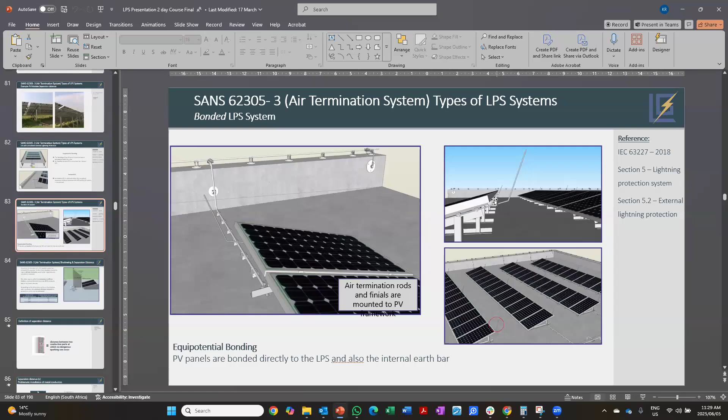And to determine this separation distance, there's a calculation in the standards. I'm not going to go into that, but there's a calculation that can work this out. Alternatively, you can put in your standard air termination rods, which will basically give you separation distance. There's two types of shadow.

There's core shadow and diffuse shadow. A core shadow, as you can see, is a dark shadow that will cause shading onto your solar panels. That's also a big problem we have in industry. Alternatively, you want the diffuse shadow, which is like a light shadow on your solar panels. So that is the idea when you're installing lightning protection.

To get this separation distance, there is a calculation that's worked out. So if you use a 10 millimeter rod, it needs to be 1 meter away from the solar panels.

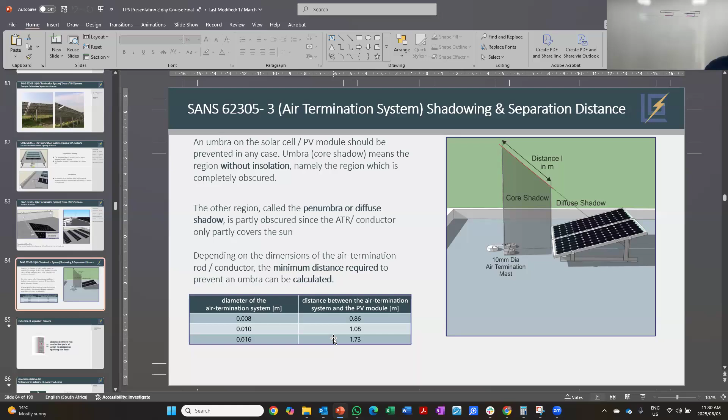No, it's fine, absolutely. So what we find is there's no such thing as a perfect installation on a solar installation when it comes to lightning protection, because there's always challenges. For example, if you take most sites, I'm talking about shopping centers, your big commercial projects, the big objective of the EPC, the solar installer, is to try and see how many megawatts or kilowatts can I put onto this roof, and how much space can I take up. But what many of the EPCs forget is, what about the lightning protection?

So now there's some cases where I have to be a meter away from the solar panel, and we can't do it. We can't be a meter away purely because the parapet, which is the side of the building, is 500 mil away. So now comes the question, how do you do it? And that is exactly also why many installers will opt to install, like the video, air termination rods below the panels. So that is a big challenge we have in the industry when it comes to lightning protection for rooftops.

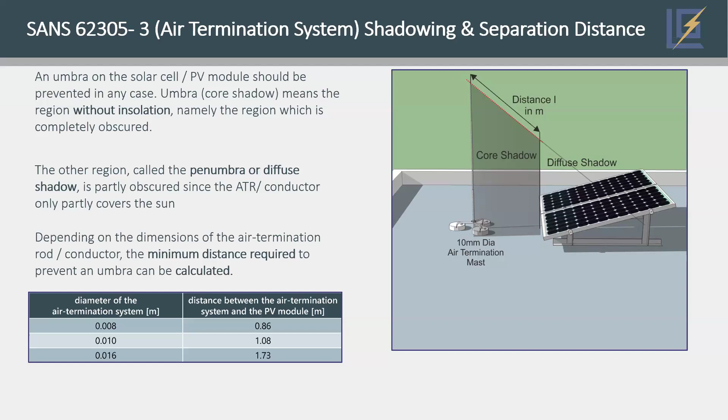Now, most cases, depending on the roofs, it also becomes tricky because the brackets you get from Lumax, the brackets you get from K2 or any alternative company, has got anodizing a lot of the time, so there's no bonding. And the problem we face is SANS 10142 says that if you put anything on top of a roof that is a steel structure, it shall be bonded. So now you go to site, you install your array of solar panels.

Let me see if I've got another picture. Let's use this. So you install your array of solar panels on a steel roof, and you use a Lumax clamp to fasten it.

The problem is solar installers link each solar panel with 6 millimeters square or 4 millimeter cable, whatever the standard recommends. Then you've got a cable running into your cable tray, which goes down to an earth rod, and it gets equipotentially bonded. But what we find is, because of the waterproofing on the roof, and because of the anodizing on the clamps these days, since they're not really galvanized, there's no continuity.

So I can test between this solar panel frame and that structure, and there'll be continuity, 100%, 0.2 ohms as per the standard. But if I take it from that Lumax clamp to the steel roof, 99% of the time there's no continuity, because of that anodizing. So now that brings the question.

The standard says your solar system must be electrically bonded, equipotentially bonded, meaning you need to connect to the electrical system. Your building needs to be connected to the electrical system, which shall be done by a registered person. So that has to be done. And what we're finding in 99% of cases, the solar panels have continuity, but the roof to the solar bracket has no continuity.

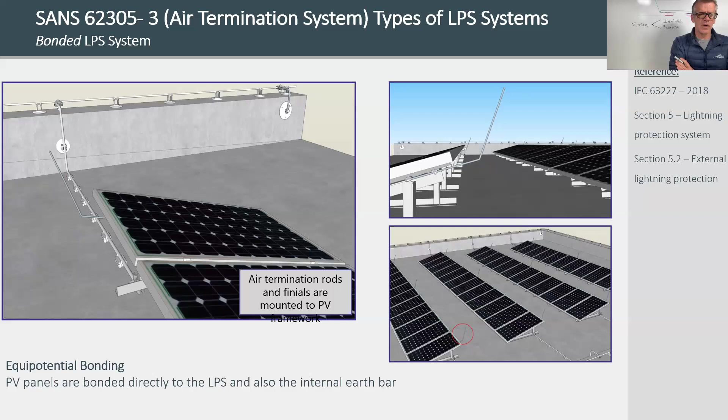Can you stop sharing quickly? Sure. I see we've got one or two questions coming in, but before we look at the questions, I am going to pin the camera. I don't know whether it has value, guys, but if you can't see my camera, just pin it to the conversation and it opens up the image. Kenneth, I don't know if you can see what's on my whiteboard. Yeah, I can see it.

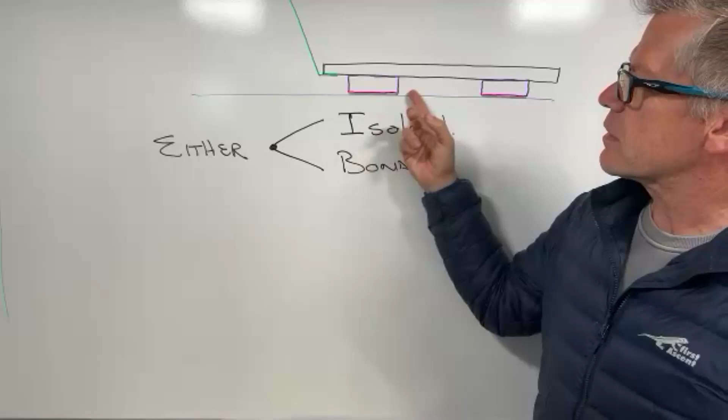Yes, so while you were talking, I quickly made up this drawing. This is what the video represented. This black part shows the solar module, the purple block is the mounting structure, and the red is an insulating rubber in between the mounting structure and the IBR roof sheet. Now that is obviously the part you were talking about that creates the fact that there's no continuity between these two metals, right?

Correct, yes, absolutely. The other thing you mentioned is if we have a lightning strike here, there's absolutely nowhere for the surge to go, because this is insulated from the roof.

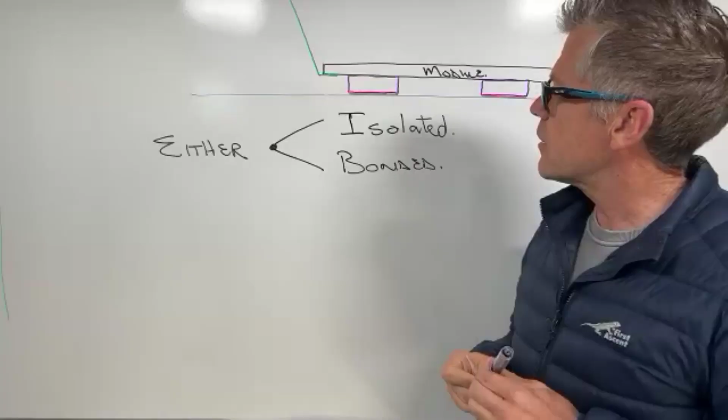So where I'm going with this is you mentioned something you called a separation distance. That got me thinking, because you effectively get two types of lightning protection systems: an isolated one and a bonded one. The one where you have the separation distance, that's the isolated one, isn't it?

Did I lose you? Have I lost you? No. Okay, on the isolated system you need separation distance. But on a bonded system, you also need separation distance. It's both. Remember, we're working with a steel roof. If it was a concrete roof, it would be different. Yes, thank you, perfect.

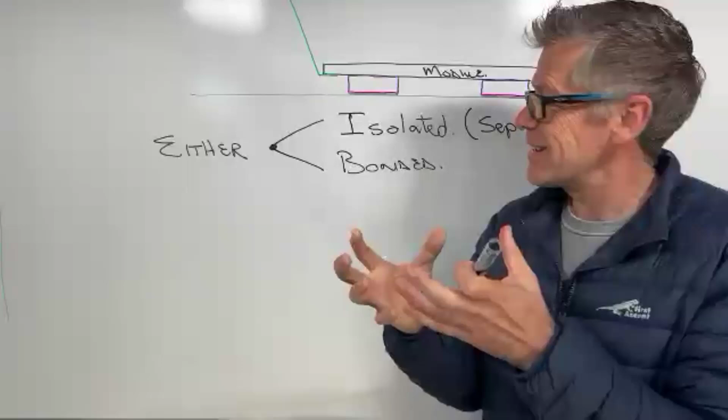This is bringing us closer to where I was heading with this conversation, because there are a couple of issues with what they've done here - they've actually forced the installation. Instead of planning it to be either isolated or bonded, the minute you've got a steel roof, you're forced to go with a bonded system, because your solar system is supposed to intrinsically become part of the same continuity of the metal. Am I right? Yeah, absolutely.

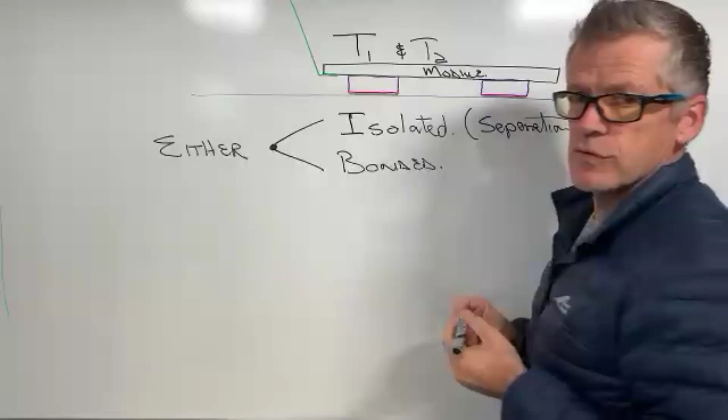So because they've put these air termination rods in, it means they are expecting lightning. And because they're expecting lightning, this forces them to put in type 1 and type 2 surge protection equipment. Theoretical, yes. I'll get to that now - give me the practical side of the conversation.

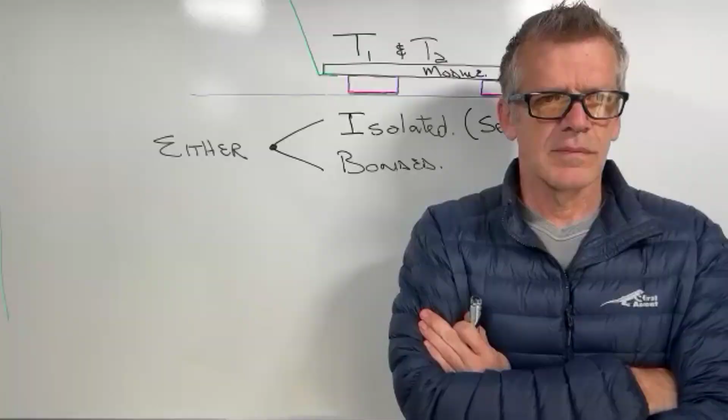So what we find at the moment, we're just talking about steel roofs now - it's now been proved, over 70 megawatts of projects, that the inverters come out standard with a type 2 surge arrestor. The standard, the lightning protection standards, and SANS 10142 actually say if a lightning protection system is installed and it is bonded, meaning you bring lightning currents into your system, you need to install a type 1, type 2 lightning arrestor. That's the theoretical part. The practical part is it's not economically viable to install class 1 SPDs, because for that inverter, if you've got 20 strings, you'll need to install 20 type 1, type 2s at, for example, 2,000 Rand a pop. So now you're looking at a cost implication for something that might not be needed.

Because if you start thinking about it practically, that steel roof is connected to either rebar of the building or to I-beams, so you've got a hundred different paths going down to ground. So by the time it gets to your inverter, the type 2 will be able to clamp that lightning voltage. According to 60364, which isn't a solar standard, it's a similar standard, a type 2 must still handle lightning currents as well - they call it partial lightning currents - so it will be able to absorb that lightning current. That's the practical part, and that's what we've done for 70 megawatts with no problems.

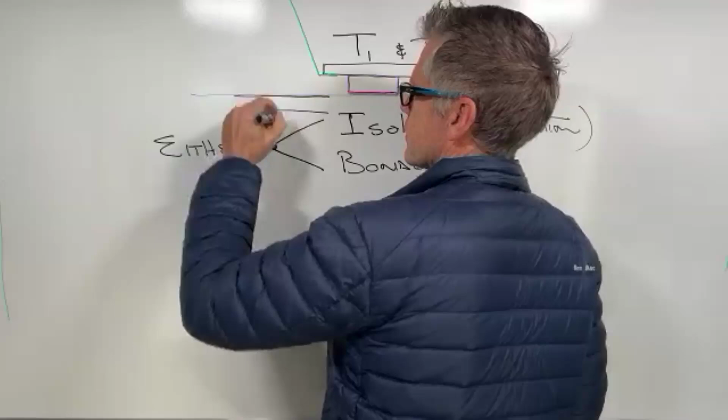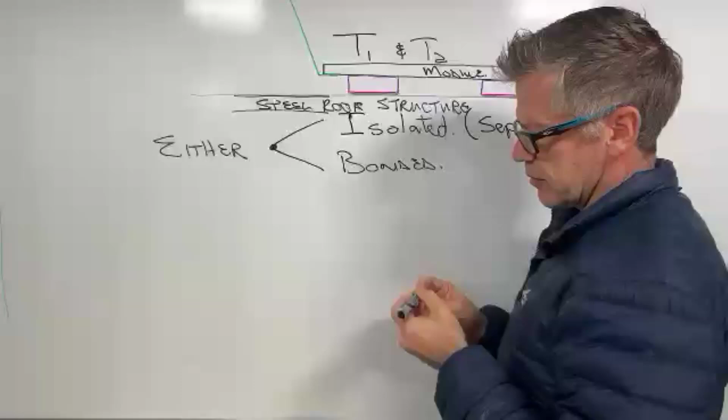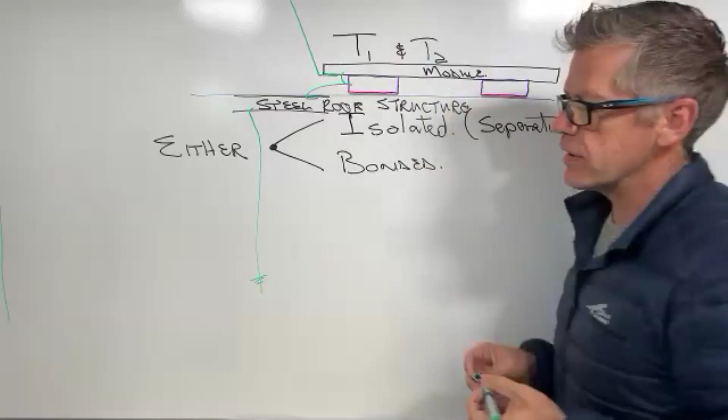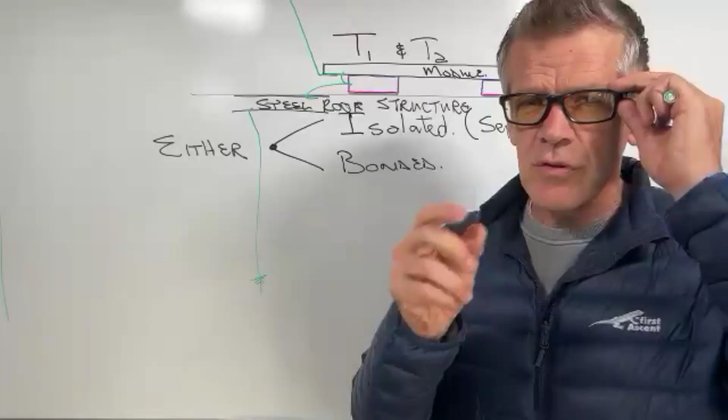But now what that means is between the roofs - so if I have my purlins, my steel structure, my steel roof structure over there - this is going to mean you have to ensure that this is continuous to that, continuous to that, continuous to whatever it is. If you have steel beams going down bolted into concrete pillars or foundations, this gives you a path, and you're allowed to use it according to the standard, but it's not going to help you if you just have one.

So on a steel roof like this, you don't need to add - maybe I can start here, because you're going to ask how do you know if it's continuous. There's normally a tester that injects 10 amps into the building, so we can test the continuity of the roof sheeting to the building to the electrical system. If that is 0.2 ohms, then you know the down conductors are fine, and you don't need to add any additional down conductors because it's already connected to the roof. As soon as that continuity is not there, then you have to do what Carl is saying - have down conductors that go to an earthing system.

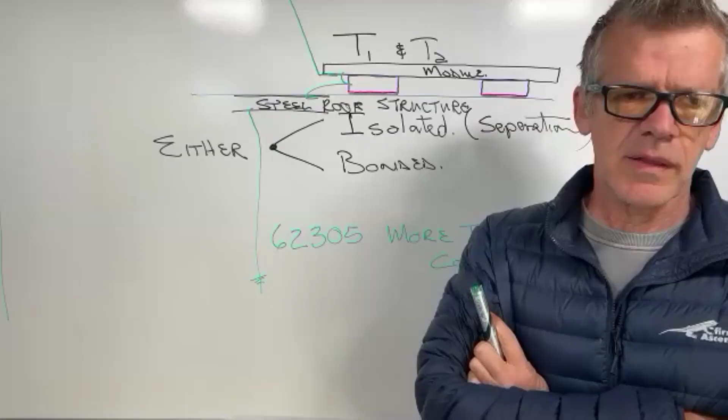Does that make sense? I'll show a picture just now, I've got it in my presentation. I'll show the difference, that'll be pretty cool. Thank you very much. Was there anything else? Can we quickly jump to the questions?

We can, and then I'll show that. It's fine because I see there's quite a bit. Yeah, where do we start?

So Peter asks, can you use the roof itself for bonding, or do you still need to bond the air terminations with each other? And is it needed to run a down conductor to an earth spike?

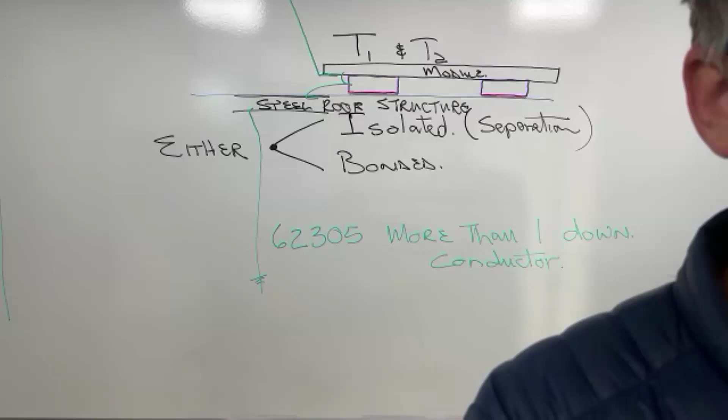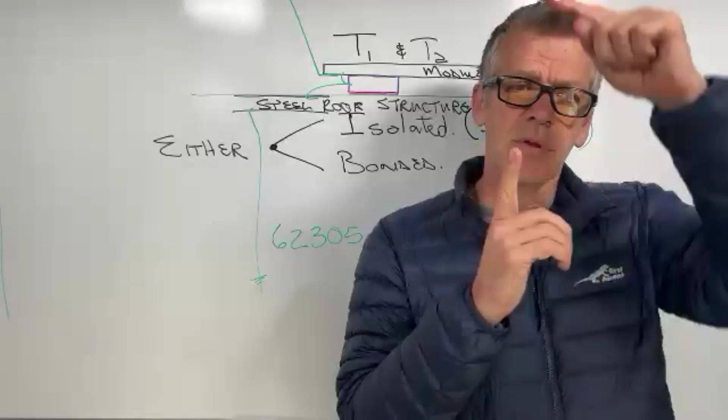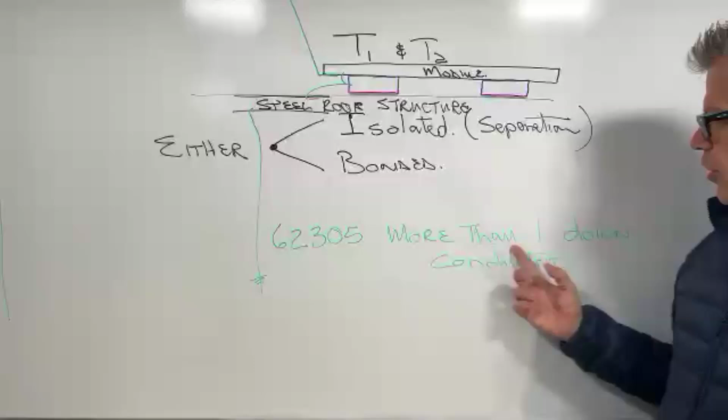So Peter, I'm going to answer that, and then Kenneth can add to it. If you're expecting a direct lightning strike, you've got to ask yourself: is one earth spike with one down conductor going to catch whatever lightning strikes it and safely conduct that down to earth? This standard says no. It says if you're expecting a lightning strike, you have to have more than one down conductor, and you can't go with a 6 millimeter or even maybe a 16 millimeter. You've got to size your cable according to what it is you're expecting to happen on site.

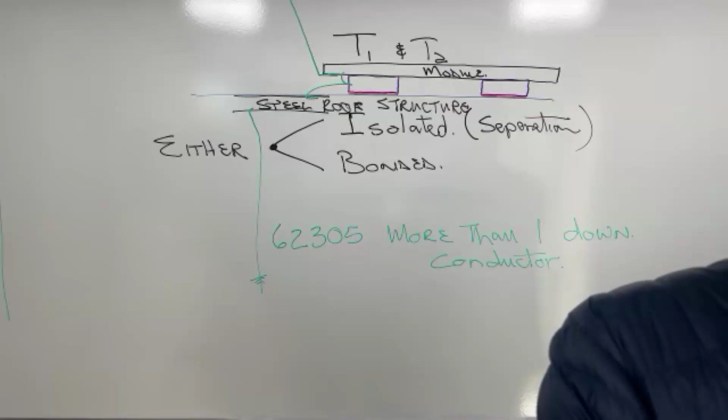Kenneth, to answer that: it's 50 mil square that's normally needed for down conductors. But in this case, you're right, it's exactly what you explained. Yeah, it's right. There's nothing more to it.

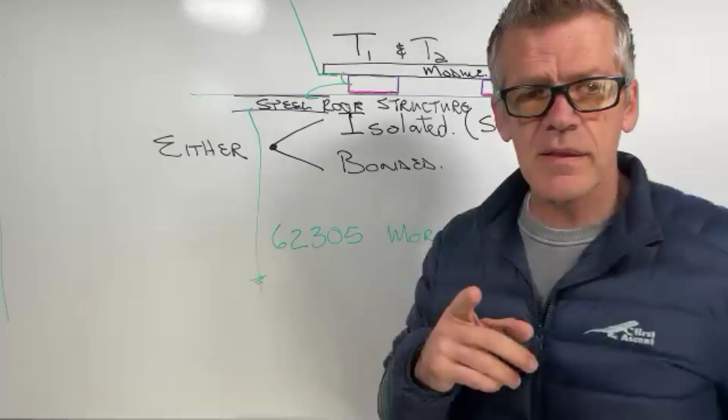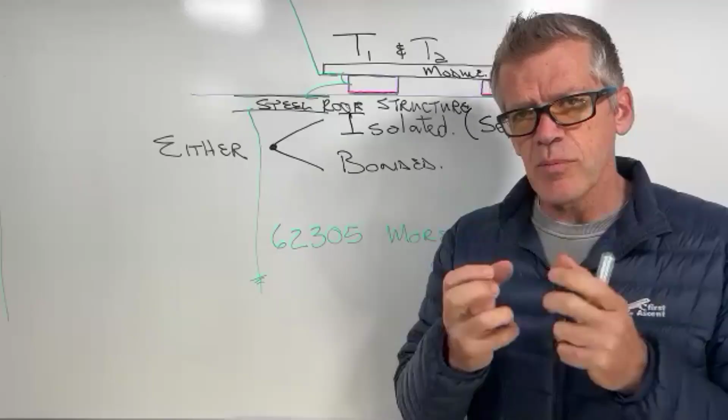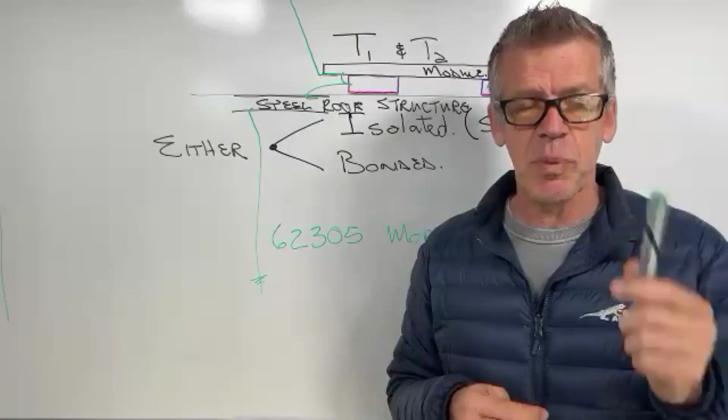I like the 50 millimeters squared because it makes provision for mechanical as well as electrical stress. Correct, so you've got to use a conductor that can handle not only the electrical conductance but the mechanical stress that the lightning will put on it. And for that, the standard says minimum 50 millimeters, but it specifies 50 millimeters for copper, aluminium, or steel.

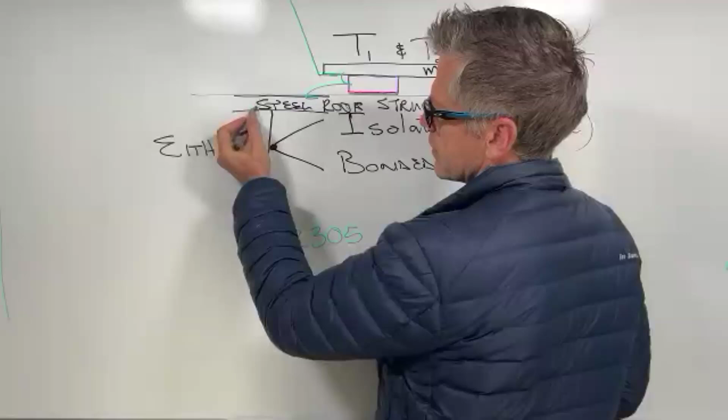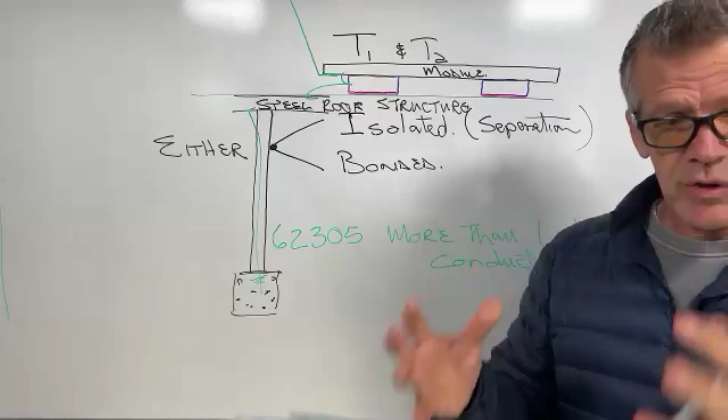Yeah, that's beautiful, because that brings us back to this pillar, as well as the foundation and all the other little bits that go along with it, to get your earthing system sorted. But that's something you'd also be able to assist the guys with.

Once you do a test, what we found is most buildings, I'd say 99%, already have continuity on the roofing structure to the building. So that's already done in place. It's very rare that you find a roof that's not bonded.

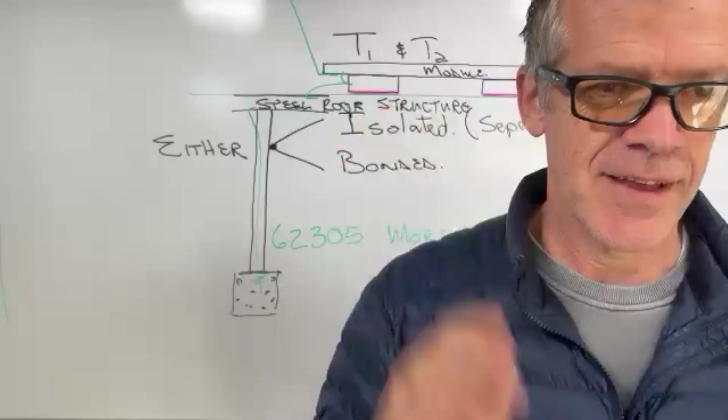And then we have Kevin. Kevin says: a vast number of installations, from domestic to commercial, are overpopulated. Maintenance and access walkways are ignored in favor of filling up the roof to a point where first responders would not even be able to get onto the roof. The aspect of fire setbacks and walkway standards are far more critical for safety. This is a real safety concern. The industry's fixation on grid safety in relation to these real safety issues is misplaced. Fully installed systems are actually a risk to the end user, their buildings, and first responders.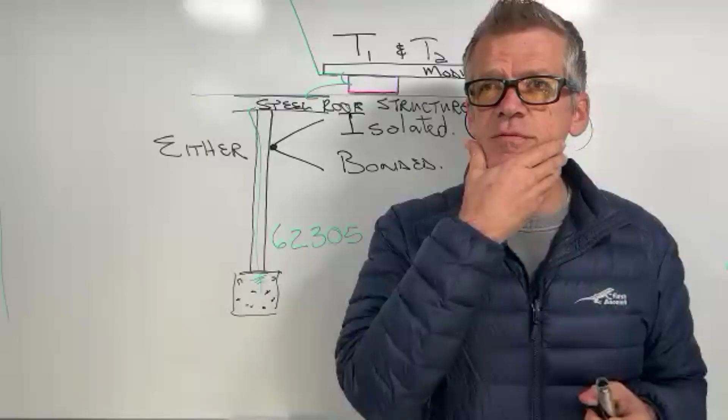Kevin, I definitely agree with you there, and I'm not dodging or sidestepping the issue—what you're saying is correct. But I think this discussion would have to be a different topic. That would actually make for an interesting meeting, so maybe the next one or the one after that, we could talk about first responders and access on a solar installation. At the moment, I think everybody's placing a lot of emphasis on electrical safety and electrical standards.

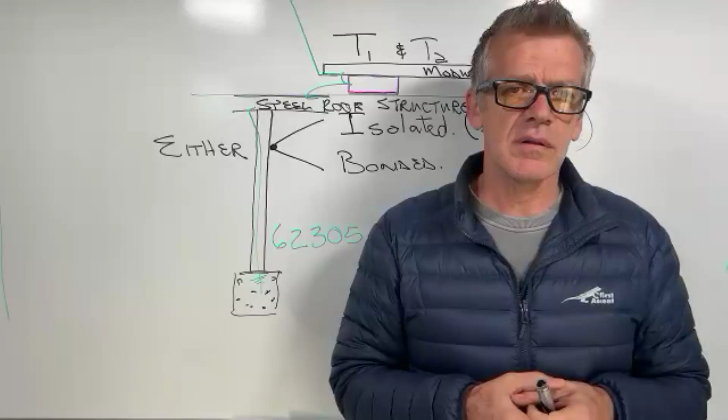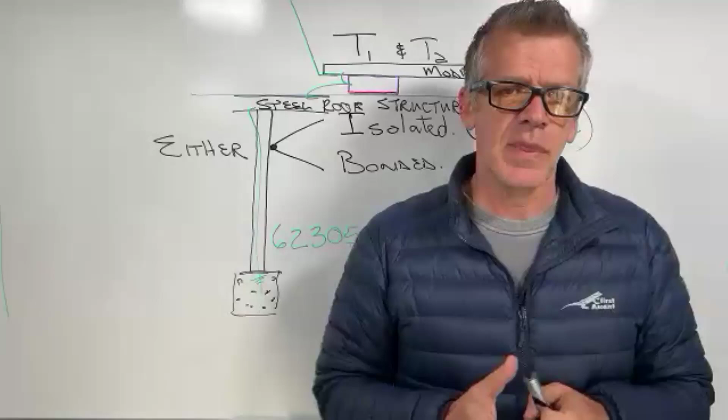Electricians are not trained to do earthing. Earthing and lightning protection aren't part of their training. I'm not talking about single phase testers, guys, I'm talking about the whole string—the whole range of them aren't trained for earthing and surge protection on solar PV systems. So it's important to cover these topics.

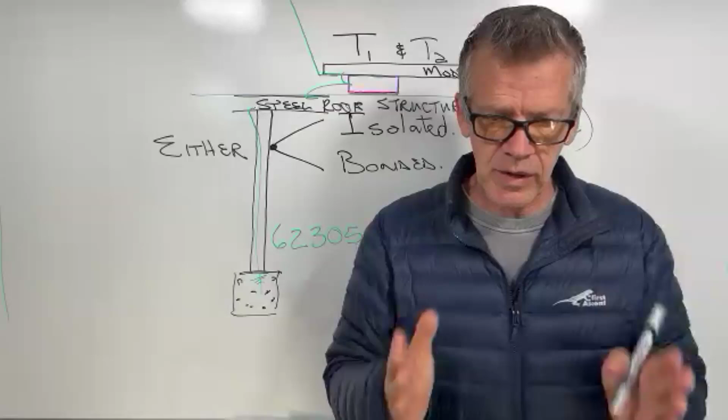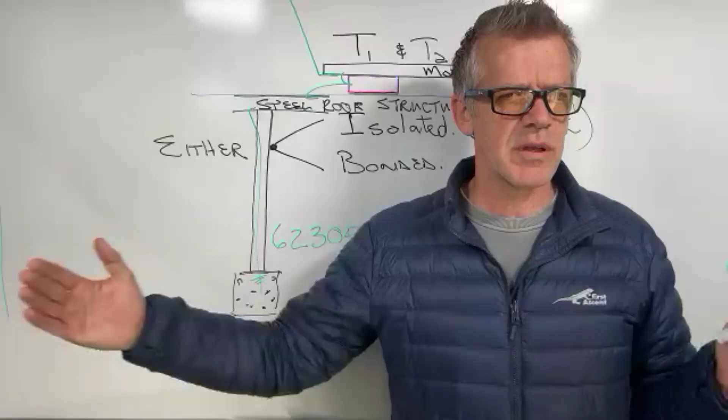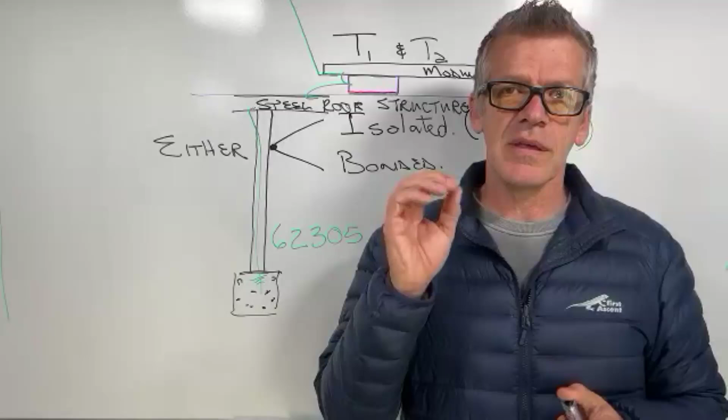About what you were talking about, Kevin: these guys had walkways every second row, two strings of panels next to one another with a narrow walkway between them. Now, I think the standard requires, was it a meter or 600mm? I don't recall. Nowhere on the perimeters was there a meter gap, but there was a big enough gap to walk safely, and there were walkways in between the strings. So the systems are definitely installed better than they were in 2016, 2017, when guys would just cover the roof.

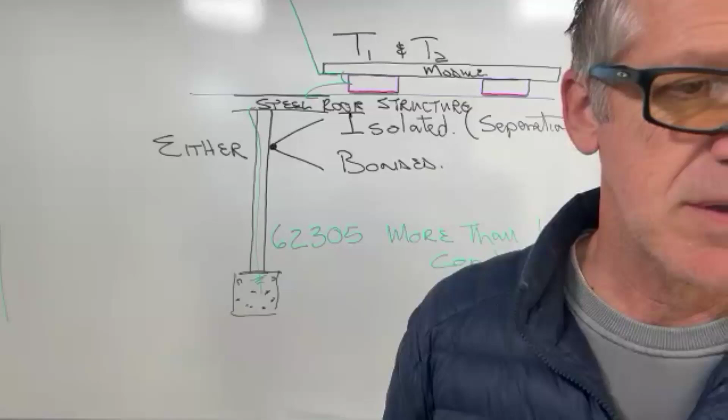I don't know about the current average practice.

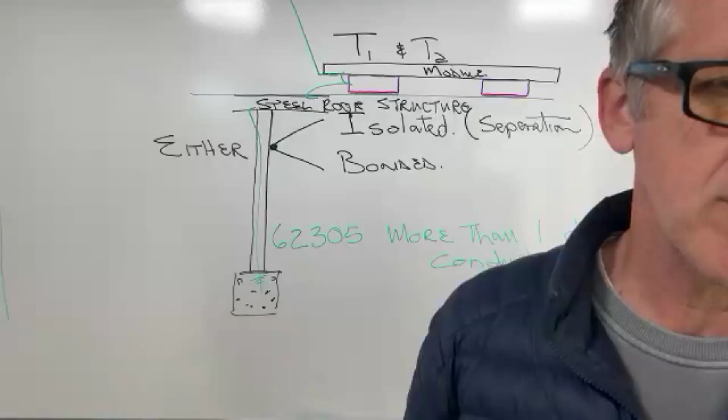So normally on a concrete roof, you don't install it the same way as what you do on a steel roof. The brackets and everything are different. So ideally what happens, it's actually the best scenario for a concrete roof to do an isolated system, which means that you're taking the lightning currents away from your solar panels. In saying that, as soon as it takes those lightning currents away from your solar panel, you need to dissipate it.

So there's two options. Either you use dedicated down conductors, that's the aluminium or copper that they run on the side of the building. Or alternatively, you can chip into the rebar in the concrete and connect it to the existing rebar structure. Those are the two options you'll need for equipotential bonding, because when a building gets erected the first time, the building is already electrically bonded. So equipotential bonding is already done. It's literally taking your lightning protection and doing equipotential bonding onto that.

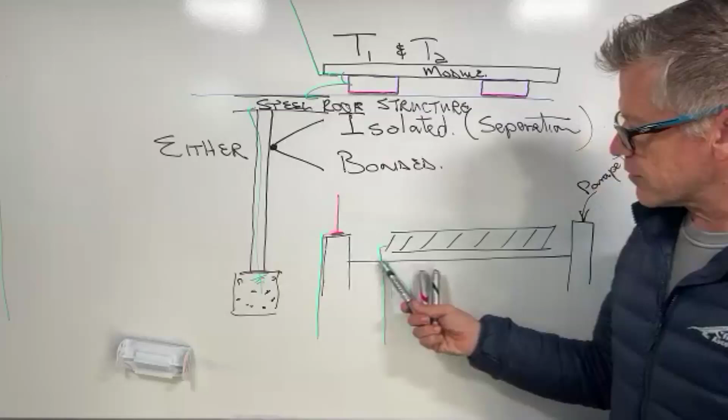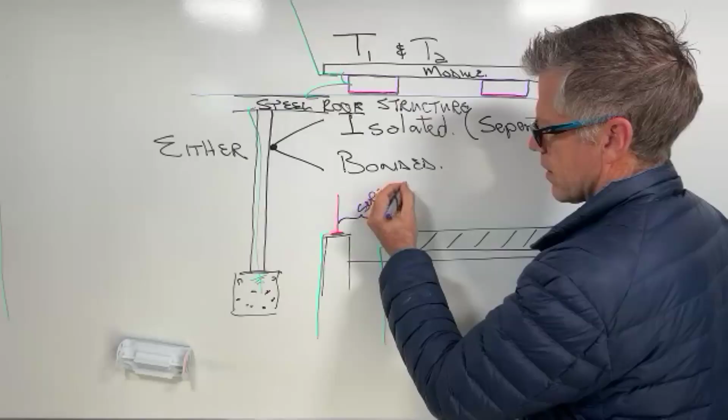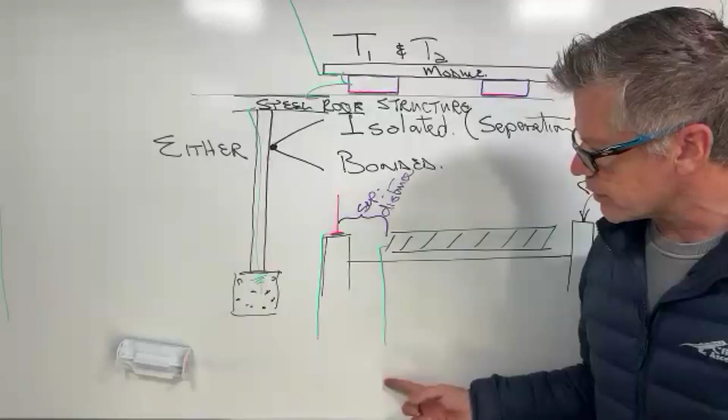So what I've just drawn while you were chatting is a flat concrete roof. I've got the air termination on the parapet. That section is the separation distance. The difference here is that your lightning protection goes down to the ground. It's bonded to your earth bar and your DB board, and this is bonded to the earth bar and DB board. But this section ends up with type 2, if I remember correctly.

Inside your AC board, you're going to put in a type... well again, the standards, theoretical and practical. Normally type 1 you use always with the lightning protection being an isolated system or bonding system on the AC side. On the DC side, you can have type 2 on an isolated system because you're not exposed to any lightning currents.

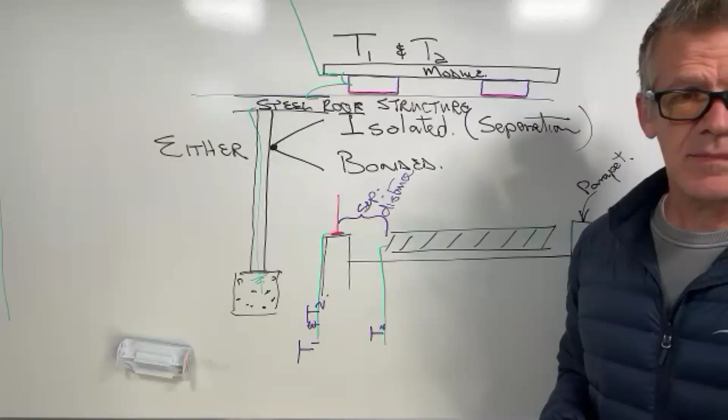Thank you very much. Okay, so that answers that question. I think it does. Yep, I'll show pictures just now to explain it more, picture driven for them, so Ntlantla can understand.

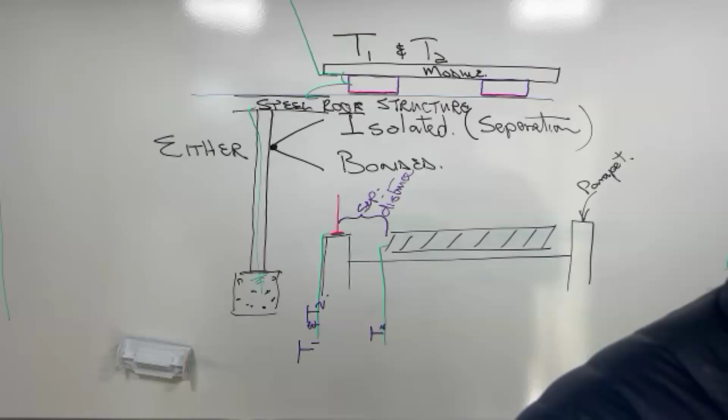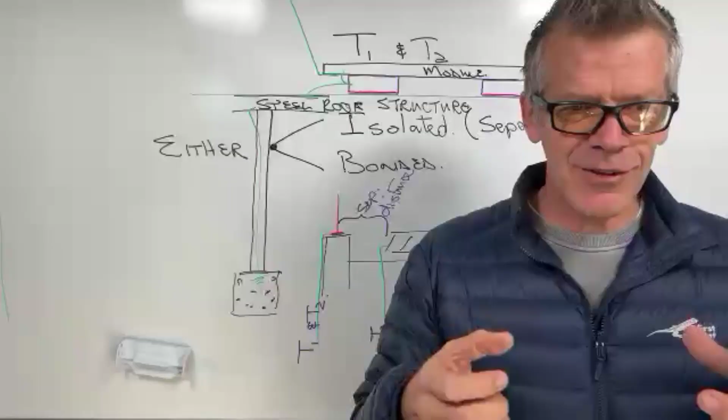Ntlantla wants to know whether copper bonding strip is allowed. It would be allowed if you don't just use one bonding strip. You'd have to use lots because you're trying to get the square meterage or square millimeter, or the amount of places where you can get that power to dissipate. You're trying to get more of those. So can the bonding strip work? Yeah, it can work. Is it ideal? Probably not.

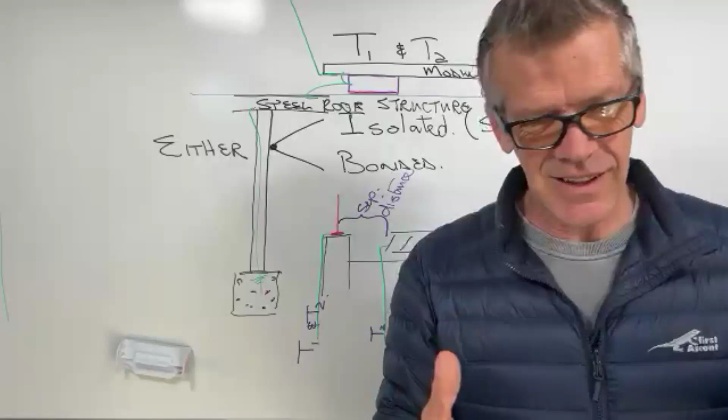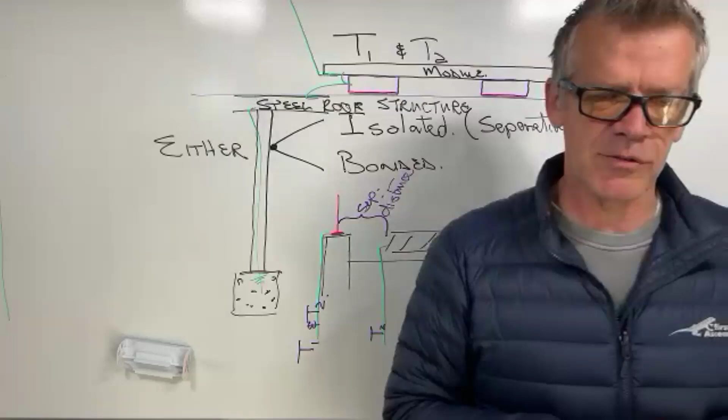Also, for me, the interesting thing about copper bonding strip is aluminium. Aluminium doesn't like copper very much, so you shouldn't bond copper and aluminium directly to one another because you're going to get bimetallic corrosion.

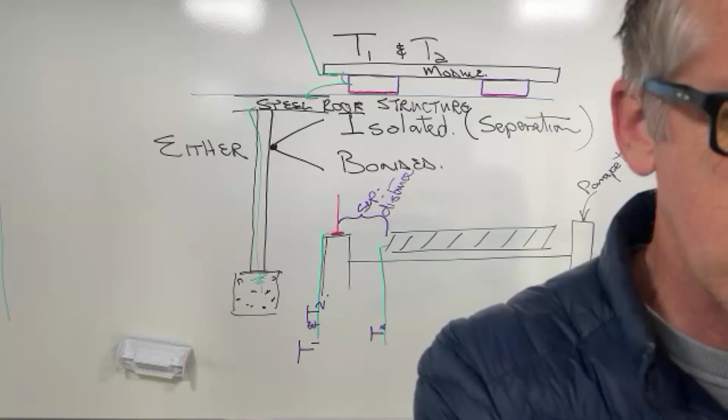Ruan says we found that buildings are non-compliant in terms of lightning protection, bonding and earthing of their steel structures and roofing. That's quite true, especially with older buildings. Ruan says they expect you to do lightning protection, bonding and earthing only for the solar system. In my opinion, you can't do partial installations, the complete site needs to be compliant. When we advise clients on this, we always end up being more expensive than other installers.

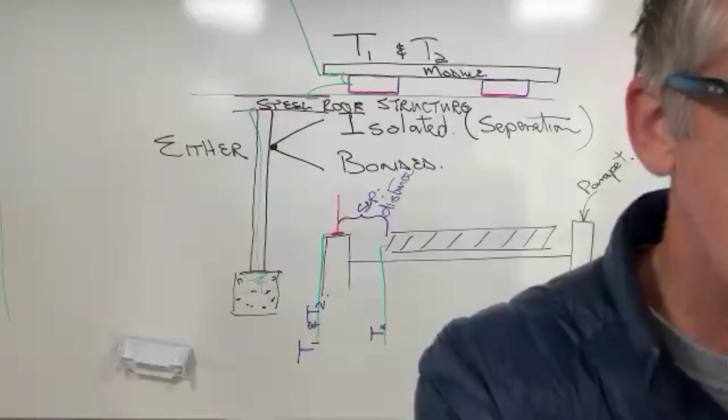Kevin? Kenneth, sorry, I'm reading. Yeah, I'm actually shocked, to be honest. Ruan, thank you very much. You're probably below 5% of the people that actually take notes of exactly what you said. I'll comment it, I'll try and make it as brief as possible.

You're absolutely correct, it is partially done because a solar installer is only responsible for the solar panels. The building's lightning protection is purely on the onus of the end user. So I'm going to paint you a scenario. According to the building regulations, SANS 10400T, it clearly indicates if your building is in a lightning flash density greater than 3 or 7 strikes per square kilometer, that's your lightning flash density, you will need to do a risk assessment.

Upon doing a risk assessment, there will be a 100% chance of needing lightning protection for the building because you've got occupancy, people inside the building who can get electrocuted by lightning. This is called loss of life, which means you'll need to install a lightning protection system.

Now comes the problem. Most companies don't do that. The end user doesn't get the correct documentation, and he doesn't follow the standard, the building regulation, which is normative as well, by the way.